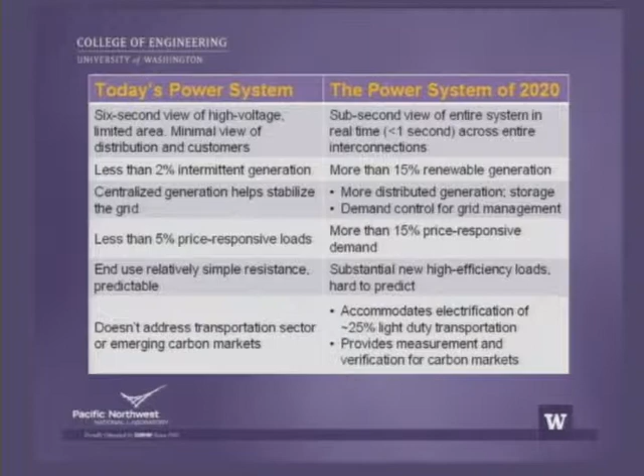Probably more than 15%, probably 20% of end uses will be able to get a price signal, and that'll give people a chance to engage and help support and respond to the real-time price of power. When we monetize carbon, we're going to push efficiency in this country like you've never seen it pushed before. And you're going to see a lot of new loads, power electronics like LED lights and other things that will dramatically change how the loads behave. And I think you'll see a lot of transportation get put on. So my point here is we can't design solutions for today's grid, because this grid is going to change dramatically, more in the next 10 years than it has in the last 80.

All right, so Dean O'Donnell asked me to frame a few thoughts in terms of, so what are our choices? How do we go about solving some of these things? I would highlight, number one, if we have the ability to look at the system 30 to 60 times a second, and then have smart meters to provide two-way communications to the consumer's home, we have the opportunity to fully leverage that new information technology to see this system with transparency like we've never seen it before. With high precision, do it in real time. It'll help us improve reliability, squeeze more out of the existing assets, and optimally expand and operate our system for economic and energy efficiency.

And when I talk about asset utilization, the big transmission line that goes from the Northwest to California, it's rated at 4,500 megawatts. That's 4.5 nuclear plants worth. Its thermal upper limit is 7,000 megawatts. We're leaving 2.5 nuclear plant equivalent of capacity lightly used on that line because we can't see the system in real time, so we rate it very conservatively. If, with new information technologies, we can see it in real time, we'll be able to uprate that line to get a lot more economic productivity out of that transmission line. That's just one small example.

So I mentioned phasors, going from one every 6 seconds to 30 to 60 times a second. Smart meters, you've heard about them. In our demonstration on the Olympic Peninsula, we went from 1 data point a month to where we were getting 9,000 data points a day from each residence. And that gives you resolution to really understand how to optimize voltage and other things at that end use.

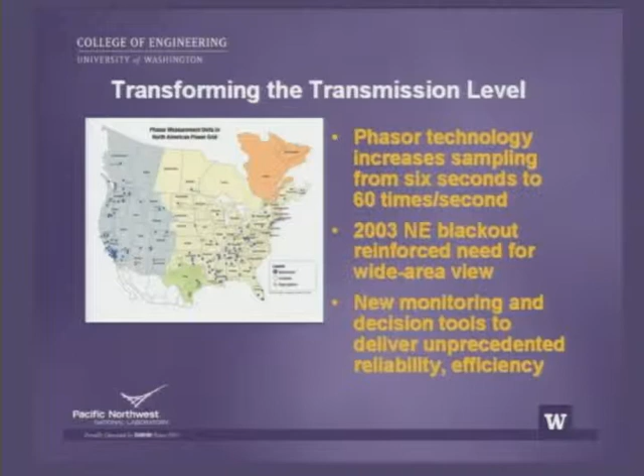The Eastern Interconnection is going to get to about 500 devices based upon some of the grant investments. I think it would have taken us about 10 years to do that under the previous approach. So it's basically a big acceleration of getting some of that fundamental infrastructure in at the transmission level. Texas is doing pretty well. I mentioned earlier this issue of you get data and they'll deliver new knowledge. Texas lit up their first 4 phasor measurement units last fall.

And in the first week, they found 3 dynamic or oscillatory anomalies that they had no clue were there underneath their system and were making them vulnerable. So again, it's like going from an X-ray to an MRI: new discovery, new knowledge. Now what do you do? It gives them much more power.

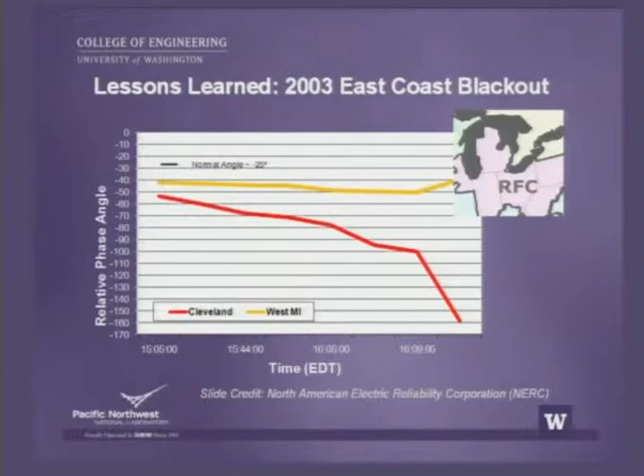So we had some fun in the Pacific Northwest here. Senator Murray and others helped get what I think really is still the poster child for smart grid demonstration in the nation, where we set out to do an economic experiment. I know that's heresy in an engineering college, but it was an economic experiment to say, look, will consumers sign up for real-time prices? Will they care about the information they can get from a smart grid? What would they do with it?

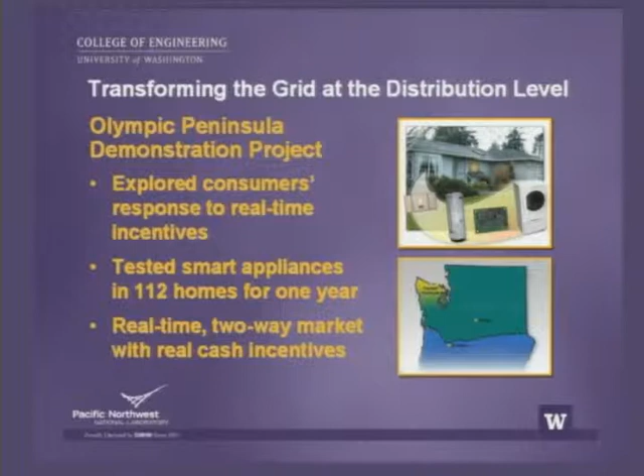We wired electric water heaters, the HVAC system, and dryers. We tried out a couple different devices, but the key thing was we gave them a price signal. We made it easy for them to respond to that. We basically gave them a slider switch. We said, you can choose to be either really green or really comfortable. You set the switch where you want it. We'll give you a red button to override it for 24 hours if you're having a party at your house and you just don't want to play.

But we've got to tell you, the more you go towards green, the more money you're going to get back every 2 months when we send you a check as a rebate for letting your house participate and help support the grid. And we send a real-time incentive signal or price signal every 5 minutes from the laboratory to them via the internet. So that was the experiment. And we also told them that at worst you'll pay your regular utility bills, but at best you'll have a chance to save some money. So here's what we learned.

We gave them some incentives to back off a little bit when the system was struggling. And we found that over the course of a year, they reduced the load on a distribution feeder by an average of about 15% of the peak load. That means money in the pockets of consumers and utilities to help avoid upgrades to distribution systems in places like Seattle, where that's very expensive.

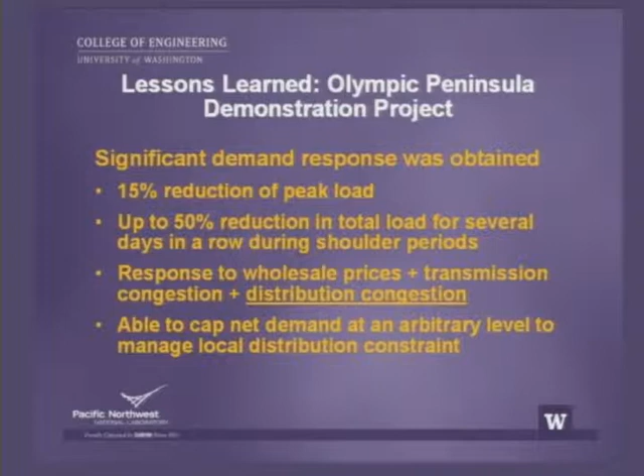We also found during a 3-day winter storm, much like you sort of had last night, a little warm-up for the winter season here, we drove strong incentives to drive the prices up to encourage people to back off a little bit. At most, it was about 1.5 degrees, 2 degrees difference. And we held those feeders down at 50% of the level, which shows the ability of an incentive signal to get people to orchestrate and work together to help a system ride through a windstorm without outages. Overall, people saved about 10% on their bills.

And, you know, they wanted to get a little action. They wanted to have some fun. But the money wasn't the big thing. In the post reviews, the consumers really wanted to be part of the activity, have a choice, get a little benefit from it, but also contribute to the greater good. This is in a state that's not a deregulated state; we don't have real-time prices in the state. Over 95% of the people said that they would very likely participate in something like this in the future.

And we have a demonstration that we'll talk to you about here in just a minute. This is it. We worked with the University of Washington and Bonneville and many others. We've submitted about a $180 million proposal. We hear it's going to get announced on Thursday. We're feeling very lucky. I wear my baseball hat inside out, my rally cap, every night. But I'm feeling lucky.

We worked with about 12 utilities in the region, as well as Bonneville, to frame investments in smart grid both at their local area, but then set up a regional incentive system, a message or incentive signal, that would extract over 100 megawatts of responsive smart grid devices out in the system to respond to regional interest, whether it's transmission congestion, the need for ancillary services to help with renewables integration, or the need to reduce capacity, to keep some of the Columbia dams from putting too much dissolved gas in the water and killing salmon. In other words, use information to help coordinate the behavior of these smart grid components at the local level to help serve some regional benefits and interests.

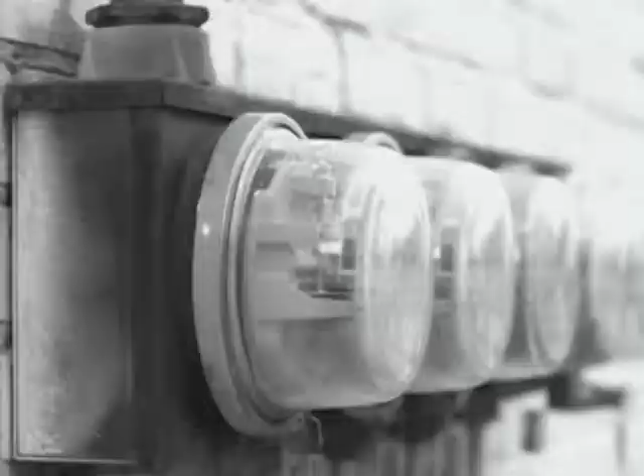But in electricity, water, and gas, and the resource side, well, what do we have? Well, we have these things called meters. Well, these meters are not designed for the end user. I mean, this is what the utilities look at to see how much they're going to charge you at the end of the month, right? And they're very hard to use. From an end user's perspective, they're just this ugly thing that's on the side of your home. But what do you really do with it? Also, they're pretty hard to find.

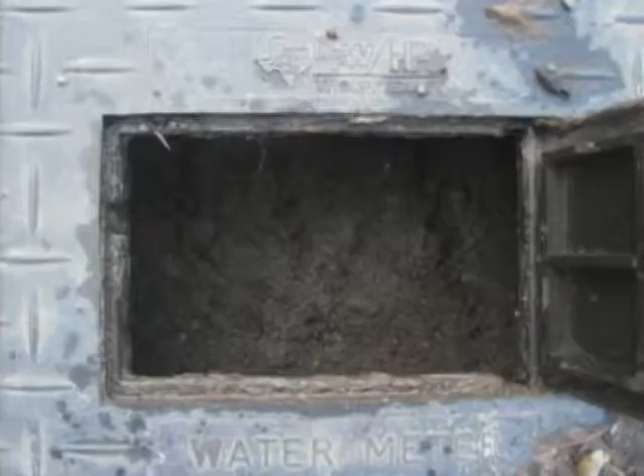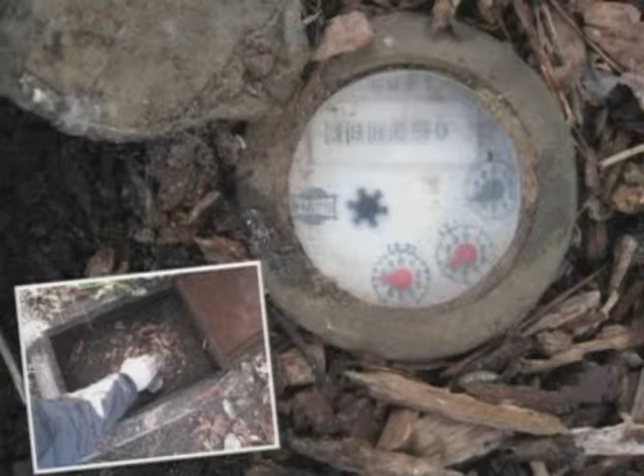This is a water meter, right? So after you do some digging, you might actually get to the water meter. And this was one of our participants' homes. You did a little bit of digging. Now maybe you can use the numbers here, if you know what they mean, to figure out how much water you're consuming before the end of the month bill comes in. So you can try to look at this thing to say, oh, how much water did I consume today? But it's really hard. I mean, this is a lot of work to actually figure out how much water you're consuming.

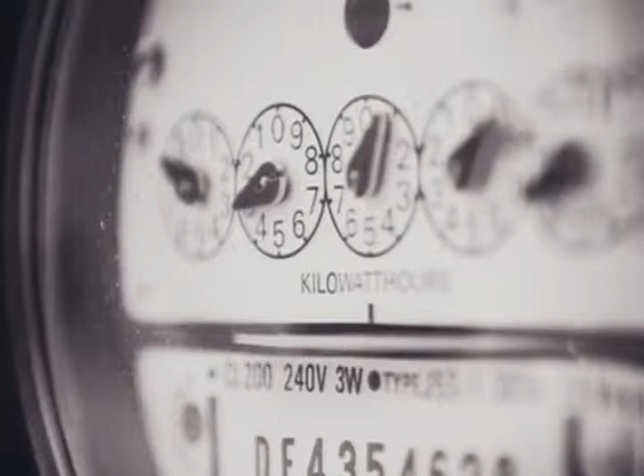They're also fairly esoteric numbers: kilowatt hours, CCF, gallons. What do I really do with those numbers? And so those things don't convey effectively to consumers exactly what you're consuming. And there's been a lot of work in environmental psychology that has shown that disaggregated feedback, meaning just something as simple as an itemized bill, has shown sustained reduction in overall consumption of 15 to 20%, just by giving somebody an itemized bill.

So the fact that you know exactly what appliance was running in your home and how much it consumed. So if I gave you a bill that showed you, here's all the appliances and electronic devices in your home, here's when they're run, and here's the relative distribution of their consumption, it can actually reduce consumption by 20% because you have that feedback that you can act upon. This is for electricity, water, and gas. But the challenge is how do you even do that? So Carl talked about a 100-home deployment. That was not easy. That was a very difficult deployment.

So what we've been working on is ways that we can reduce the overhead of installing sensors that will give you that information. But before I talk about that, a lot of you might be wondering, well, why is residential space important? Isn't the big factory down the road the one that's really consuming a lot of water and electricity? Well, that's actually a misconception. It turns out that in the energy space, residential accounts for about a quarter of the energy used worldwide. In the water space, it's actually even more. More than half of our water is residential water.

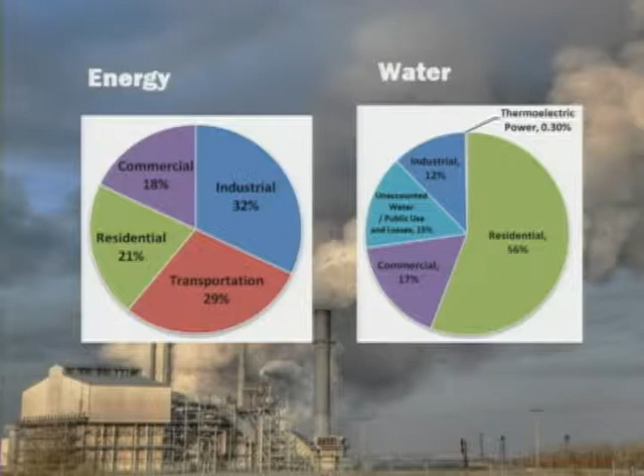So this is actually treated water, so not agricultural. This is all pumped water that's treated at some point. But more than half is what we consume in our daily lives at home. So there's definitely a need, and we can actually make an impact by reducing our residential consumption. And so what we've been doing is building easy to deploy, meaning non-expert installable, sensors. You're not going to call in a plumber, not an electrician. You're going to be able to install it yourself without any help.

Low cost, and high granularity, meaning that you get information down to each fixture or each faucet or each appliance, down to each device that you have in your home, and giving you an itemized feedback about that. And we're going to do it in such a way that it's going to give you an engaging and persuasive feedback. So it's not just going to be this bill that's just going to have a bunch of lines on it, but what are some interesting ways that we can present this information that's actually engaging? So both the sensing side and also coming up with effective feedback for presenting that data.

And so, we've worked on 3 different projects: HydroSense, ElectriSense, and GasSense. Electricity, water, and gas. We've actually hit all 3 areas pretty aggressively recently. And so I'll go through each one of these to kind of give you an idea of the kind of technology we're working on and what you might expect in the future. So before I go into that, if you wanted to build a system that gave you feedback down to each appliance, what would you do now?

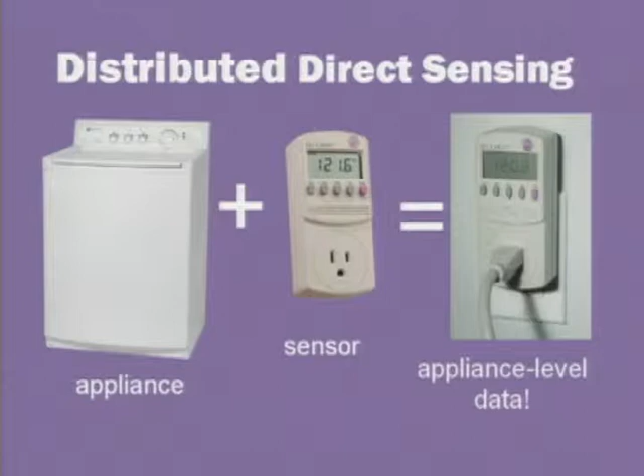Well, right now what you would do is you would employ this notion of distributed direct sensing. What that would mean is, let's say you have an appliance. You want to know how much power it consumes. You'd go out and buy a sensor. You can go to Target and buy one of these sensors. This is actually called a Kill A Watt. You can plug it in line with your appliance, and that'll give you appliance-level data, right? You can move this thing around if you want. You can install a couple of them. But this is one way of getting information about when a device is turned on and how much power it consumed.

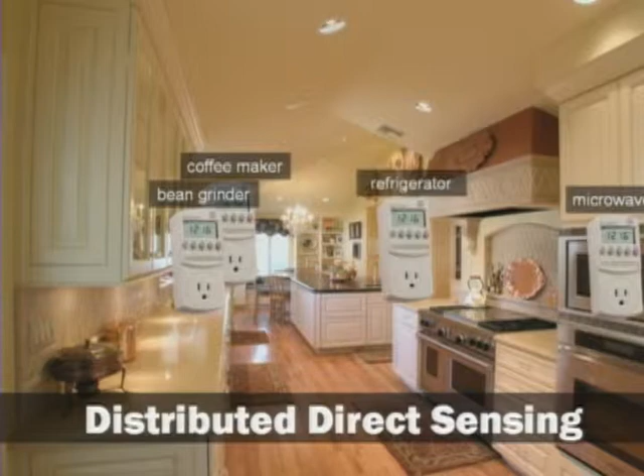And so let's go into a kitchen. What would you do with this distributed direct sensing approach? Well, I'd put one in the microwave. I want to see how much that's running. I'll put one near the coffee maker. I'll put one by the bean grinder. And the refrigerator, and all the lights, right? And so you can imagine how this actually doesn't scale that well. Even though these sensors are really cheap, the overhead of installing all these sensors is just too much of a barrier for anybody to actually go out and install it.

So this is a major challenge, right? The retrofit problem is a major challenge, because we're not assuming smart meters. Smart meters won't even give you this resolution. Okay? Smart meters might just give you, maybe at the end of the month or at the end of the week, how much power you consume, but not at this level.

So what we've been doing is looking at it from a different perspective. We're actually employing a very different sensing methodology, which is the idea of one sensor. You plug one device into your electrical outlet, and it gives you the same information that all of those sensors would give you, down to exactly which appliance is running and how long it's run. And the idea behind this is that if you think about the electricity, water, and gas infrastructure, each one of those is interconnected. It's basically a network; if you have electricity going from one place to the other, it's all one big system. So you can tap it at any place in that infrastructure. So let's just plug something in.

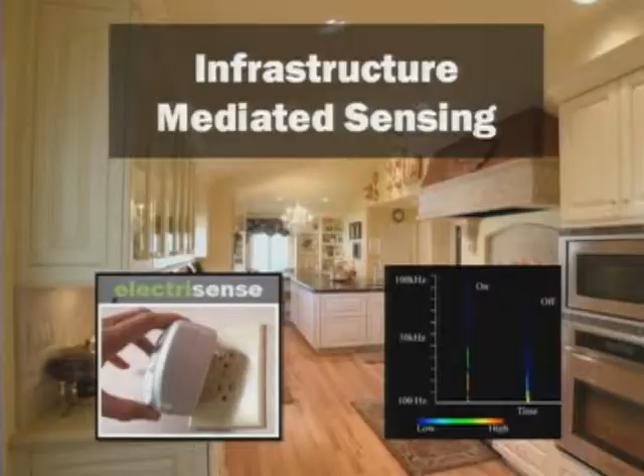And so what we've been doing is something very different. We've actually been monitoring the power line infrastructure, snooping it in such a way that we can figure out what electronic devices are being used by looking at the noise characteristics propagated by those devices. These are all electronic devices that have internal oscillators, internal components that are electrically noisy over the power line. And we've actually been able to figure out how to isolate that noise signature and tell you exactly which device got operated.

If it was the TV, if it was the microwave, if it was the TV in the living room, or was it the TV in the bedroom, down to each different appliance in your home. And we do that by analyzing the noise signature. And you can do that with a single plug-in module. So this is something that an end user knows how to install.

You plug this device into the wall, all right? Well, so this technology gives you what event happened. Did my refrigerator turn on? Did my light in the bedroom turn on? What device got turned on? We still need to get information about consumption. So how much power did this thing actually consume?

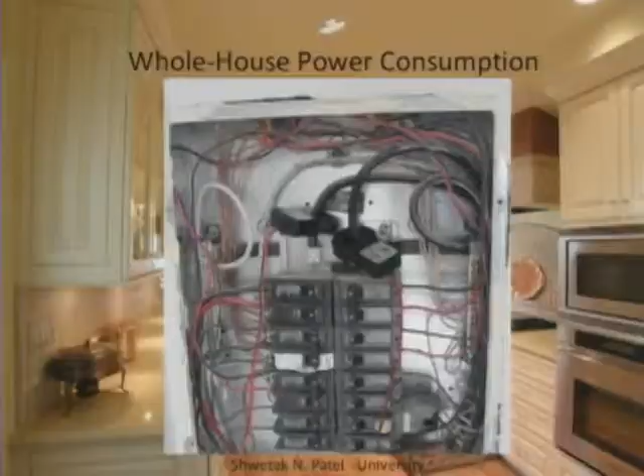And so the way you would do that now is you would open up your breaker panel. You would install these scary sensors called current transformers around the main lines coming in. Note that all of the metal is actually electrically hot. So being an electrician, I would actually be scared installing this, although this is the picture of me installing it here. So obviously an end user or non-expert would not install this, right? So this gives you power consumption.

So what do we do? One sensor that's end user installable. So what we did was we built a contactless whole house power consumption sensor. This device, you literally peel the tape off the back. It has double-sided sticky tape, and you paste it on the outside of your breaker panel, where those switches are. And that gives you the same kind of data that this advanced current transformer-based solution gives you. It's actually more accurate than the off-the-shelf solution.

It actually uses the magnetic field induced by the bus bar behind the actual panel to infer current consumption. And you can actually do this by just sticking it on the outside of the panel. So this has actually revolutionized how you can do whole house consumption by letting the end user install it. And so there's only two little LEDs there. The simple feedback is you hold it up against the panel. If it starts lighting up, you know you're in the right spot, you paste it right on there. So it's a simple stud finder-like model that people can use to install it.

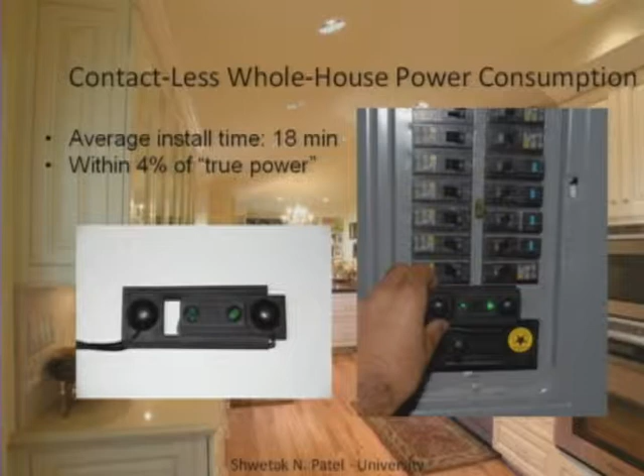How much water would your morning routines consume? So you can go down to that kind of level so you can give people consumption information, not just to individual devices, but their routines. Your cooking, your dinner activities consume this much electricity. So now you can get people to get their head around exactly where the consumption is happening and how they can curb that a little bit.

Something that's subtle here are things like refrigerator and microwave doors. You might be wondering, how do we get that? Well, it turns out when you open a fridge door or a microwave door, there's a light in there. The light has a switch. The switch has an electronic noise impulse that goes over the power line that we're able to detect. Something as subtle as a door light we can detect. So we can actually get very rich data about exactly what devices are being operated.

So things like incandescent light bulbs, fluorescent light bulbs, all connected through a light switch, we can detect. The most interesting thing is that, let's say you have two 100-watt light bulbs, one in the kitchen and one in the living room. Even though they might look exactly the same, they're 100 watts, but they're in two different locations, we can actually disaggregate those two based on the noise characteristics.

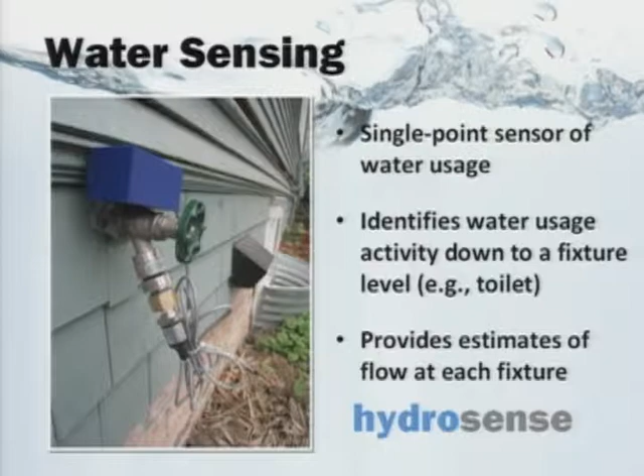So how can we do the same thing that we did in electricity for water? So the constraint is single sensor, no plumber, end user, non-expert installable. And so our technology actually does water inferencing down to each fixture, the toilet in the master bedroom or the toilet in the guest bedroom or bathroom. Is it the kitchen sink or is it the sink downstairs? And with a single sensor, how much water you're consuming at each one of those fixtures.

Okay? So the way it works is really similar to the electricity model. There's some noise patterns that are propagated over the electricity infrastructure. Well, it turns out on the water infrastructure, there's the same thing. Well, here it's called water hammer.

So every now and then you might turn on your water faucet and you hear this banging sound coming from your pipes. Well, that's because the impulse created by the activation of the valve creates a water impulse that goes throughout the entire infrastructure. And so it manifests itself as water hammer or this banging phenomenon. But if you're sensing it at one of the locations, you can actually sense it anywhere along the pipe.

So where we install our sensor is, let's say, a hose spigot. You know how to install a hose on a hose bib. So what we do is we screw it right on there. The next version will have a pass-through so you can continue to use it as normal, but you simply just screw it onto a hose bib. And the entire infrastructure is already interconnected.

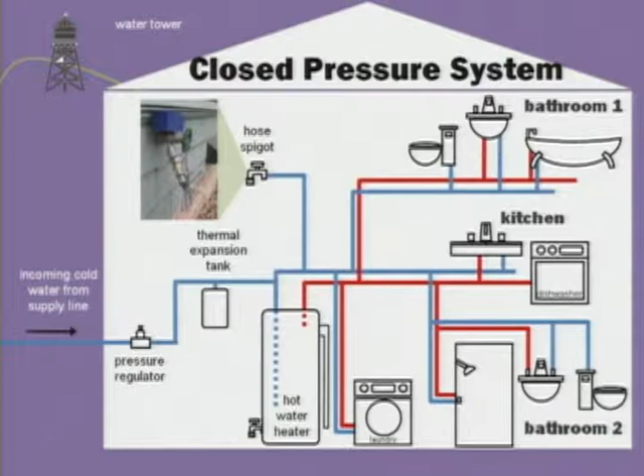Even if we put this on the cold water spigot, we can still see hot water activities because of the hot water heater. It actually acts as a capacitor. It actually connects the two together. And so by sensing one location, we know what valve activities are occurring. If the toilet in the master bathroom went off, or was it the toilet downstairs that got flushed, based on the signatures that propagate from the valves that are actually in the home. And so we use our system to actually disaggregate that information.

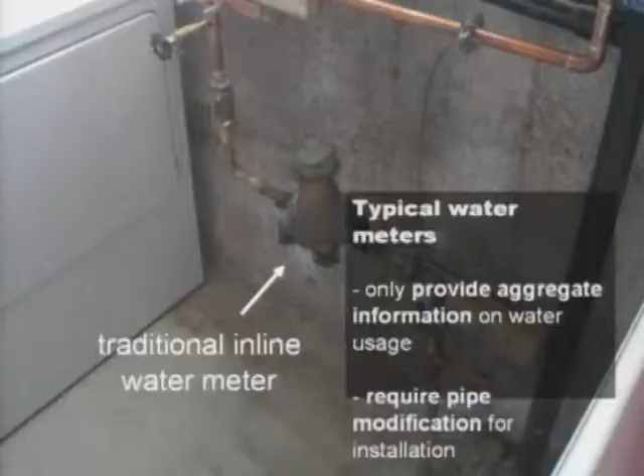And so unlike a typical water meter you might find outside, in some parts of the country you might actually find it indoors if it's really cold. And so here, you would actually have to cut into the pipes and install a sensor. It would only give you aggregate information, whereas our sensor, HydroSense, screws onto a water spigot and gives you information that's down to each fixture. And so you can see how much value you can get from a technology that you can deploy yourself without having to hire a plumber.

So we've been working in the gas space as well. So gas is actually even more interesting. Unlike electricity and water, there is no analogy or equivalent of a plug-in device, right? Where do you plug in for the gas? Well, there's no plug-in, for obvious reasons, right? Gas is not a very safe resource, and so you definitely do not want the homeowner or the consumer cutting into gas pipes or trying to unscrew those pipes.

So this actually makes it an even more interesting and harder challenge, but at the same time, there's very little technology out there to give you consumption down to which appliance is consuming how much gas. So I can't show you a slide for that because there is no cheap solution out there. So what we did was, well, we created one, a single sensor. So you notice a theme here: single plug-in modules, single screw-in modules, single devices. When my students come back to me and they say, I made 2 sensors, no, one sensor, right?

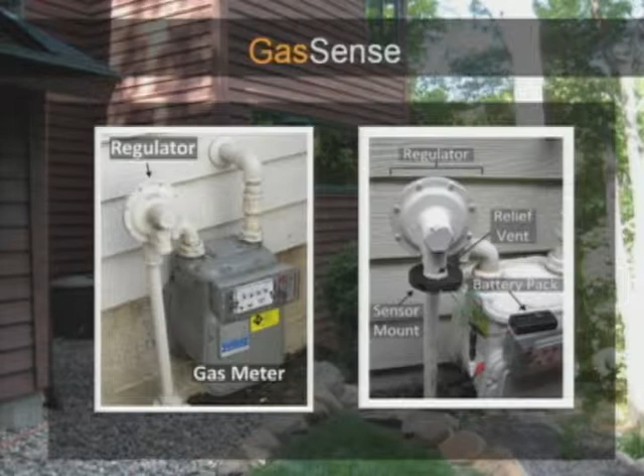But it turns out that's a great place to put our sensor. So on the right, the black little disc there is literally a snap-on disc that goes onto the outside of the regulator. You just find where the regulator is, find where that tube is, and you clip it onto the edge. And what it does is it actually monitors the regulator to infer how much flow is going through the regulator and which fixture is being used. Again, there is a noise signature that manifests itself through the entire infrastructure that you can see at the regulator.

And so we built the sensor and the signal processing algorithms to extract that information to tell you if it was your gas furnace, if it was your fireplace, gas stove, even which burner it was running. Was it the high power burner or the low power burner? All the way down to that level with a single sensor that you can install very safely.

And so we've done a lot of in-home validations with this. One of the things that we pride ourselves in our lab is that we don't just do these things in the laboratory. We do in-home deployments. A lot of these technologies have been deployed in many, many homes where we've actually outfitted these homes, did ground truth sensing to make sure that the data we're getting from our sensors, how accurate is it?

So the students often go into many different homes and deploy these technologies to see how accurate it is. So we've actually gotten a lot of field data for all of these technologies. And that's one of the values that we can get for this kind of technology, is that it's so easy to deploy that we can do a bunch of homes simultaneously.

So we've also been working on feedback applications. Now we have a very powerful sensing platform to allow us to quickly get data about consumption. Now we're looking at, well, how can we use this unique data set that we have and give homeowners and occupants information about their consumption? Now we have a whole test bed of sensors that we can use.

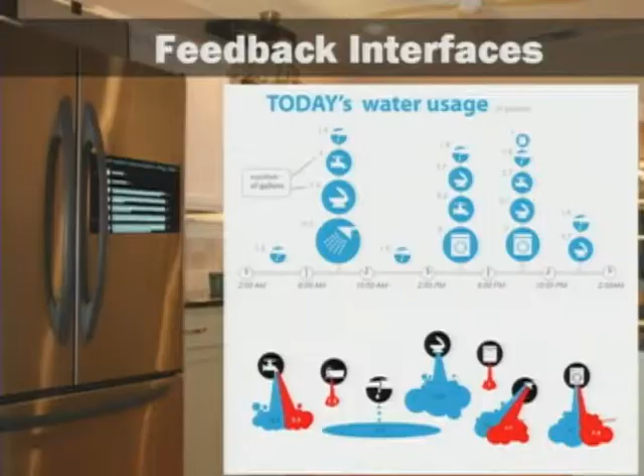So we can look at aesthetically pleasing interfaces, like, for example, this water interface here. What do we really need to show you? Do we need to show you every single device, or do we just need to give you the top 10 big consumers in your home? So we've been iterating on various designs on how do we actually present this effectively to the consumer.

And so we're actually working on the interfaces and doing deployments with these interfaces to see, well, what is the right way of showing this data to the consumer? And doing this both in a way that you can see it at the end of the month or in real time. When you consume that resource, what does it look like then? So we're doing both real time and end of the month type feedback.

And so you've heard about Google PowerMeter, Microsoft Hohm. All of these companies are going to eventually be leveraging this kind of data that we're building with our sensing platform. And you should stay tuned for this in the upcoming months.

Finally, I want to conclude with not myself, but with my students. I have a fantastic group of students that I work with. It's the students that actually make this possible. This is the reason why I'm actually up here right now. So the other thing I want to mention is that I have a very diverse set of students I work with, all the way from computer science and engineering, electrical engineering, civil, and mechanical.

So we have a very broad lab that we actually attack these problems with from many different angles. So we don't just look at this problem from a narrow perspective, all the way from the hardware to the environmental psychology and the end users and the interfaces for the technologies. The other thing to note is that we have students that are PhD students that are about to graduate, first, second year students. We have undergrads, freshmen.